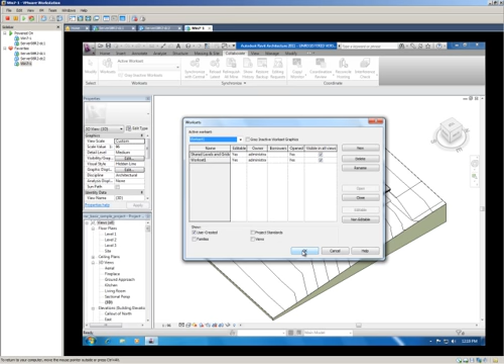Well, first thing, we're going to go to the Collaborate tab, and we're going to click on Worksets. So enabling worksets and work sharing allows us the ability to create central files as opposed to working locally. And click OK for that. Alright, and that's about it. The next step is to actually save this project onto our Revit server.

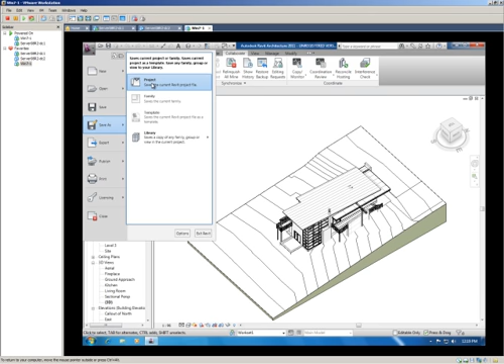So in order to do that, we're going to click on Save As. Save as project, and instead of browsing to your D drive, your Z drive, or whatever drives you have mapped as in the traditional method, what we're going to do right now is on the left hand side we're going to scroll over and click on Revit Server.

As you can see here, there's a Revit file structure, Revit Server models, and I've created the Revit Server Test version 1. Let's click on that, and this is where we're going to save our project. We're just going to call this rs_test1, and let's click on save, and it's going to save over to our Revit server, which is on DC1. Right after you finish saving the file onto the Revit server, you have in essence created a central file.

It is highly recommended that you close this file before you continue working. I'm actually going to close the entire program out just for safe measures, and I'm going to start Revit Architecture 2011. I'm going to go into File, Open, and I'm going to browse into my Revit server, Revit Server Models, and Revit Server Test version 1, and this is the Revit test that we just created.

So I'm going to click on Open, but before we do that, verify in the work sharing area that the Create New Local checkbox is selected. If you select Detach from Central, it will give you this dialog box over here, as it will create an independent file and you will be unable to sync. This is only good if you get models from consultants or partners that you want to work separate from the project. So we're going to click No to that.

So the only time you will not create a new local file is when you're the BIM administrator, and only if you're the BIM administrator. Clearing both options will actually open the central model itself instead of a copy. This is only useful for large-scale operations. This is not used for the standard user. So I'm just going to click on Open,

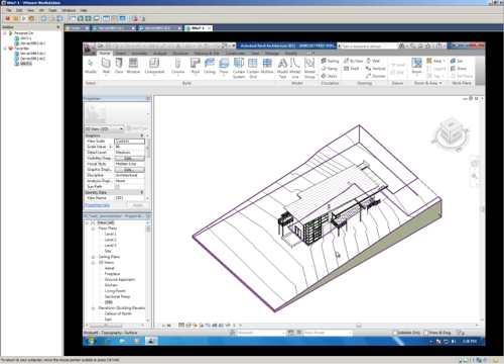and we're set. Now that we've finished creating a central file in our Revit server and gone through the concept of Revit server, you can expand this technology exponentially. In essence, creating a wide area geographically dispersed environment, allowing your Revit team to be anywhere in the world. Doesn't matter if you're in New York, Hong Kong, Shanghai or Madagascar, you can work on the same Revit file. Hooray!

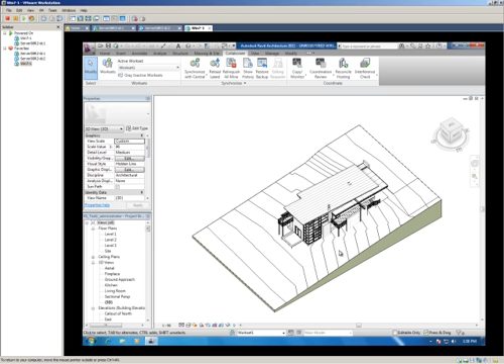So now I want to spend a little bit of time going back to our Revit Server administrator. When problems happen, all your BIM administrators out there will be scratching their heads and trying to figure out what went wrong. All BIM admins will need to be able to access the Revit Server's web access portal. This is vital for making backups and changing the folder hierarchy. There's not too many commands out there. You have to play around with these tools and get your folder hierarchy to work the way you want it.

You need to lock your files before making any backups. Please make sure that you back up your Revit files routinely. By routinely, this doesn't mean every month. It means every week, and if possible, every day. This ensures that if you have any major catastrophic problems, you can go to the last known backup and you won't lose too much of your work. And this is vital for your BIM team.

As you probably know, we barely skimmed the surface on Revit Server. There's actually a lot of potential in this technology. After creating the central server in New York, for instance, if your firm decides to open a new office in Seattle, you can just pop a new server there and call it a local server and have it communicate with your central server. This can actually touch international regions as well.

For instance, if your firm wants to open an office in Hong Kong or even Madagascar. As long as all the servers have adequate bandwidth to talk to each other, your Revit projects and your Revit team will be able to work seamlessly.